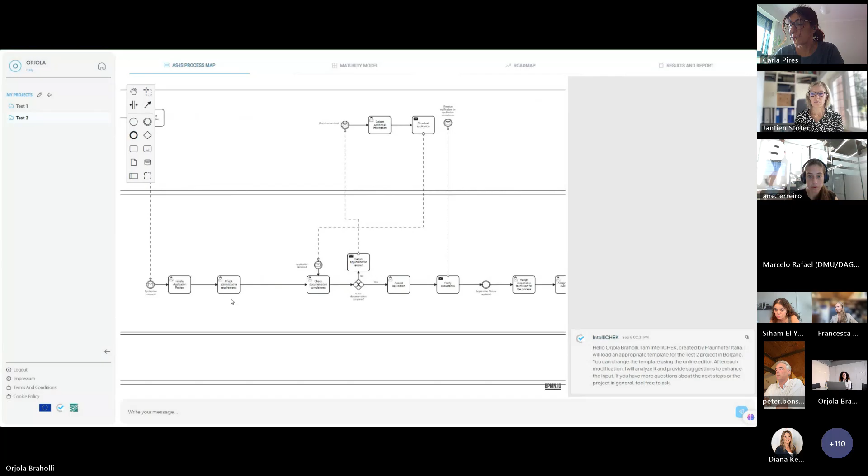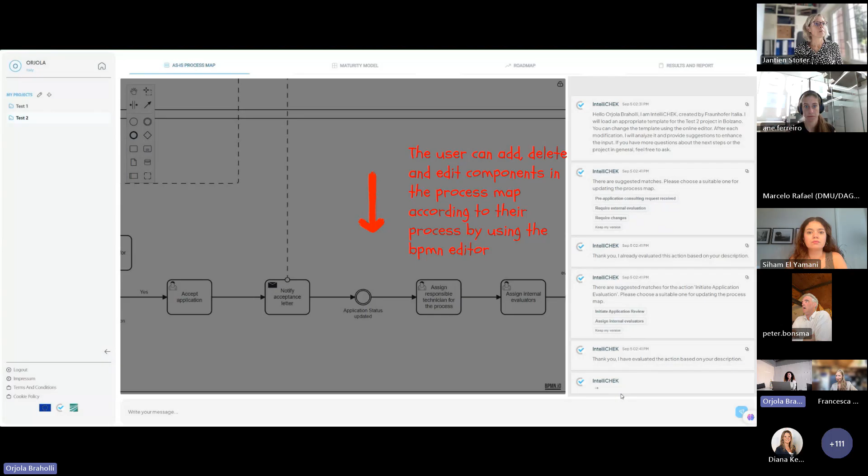So what the user can do is just create an account, log in, preferably provide a short description for their process, and then immediately start building their process map in BPMN. The tool supports bpmn.io and provides the user with a template that they can immediately start editing according to their process.

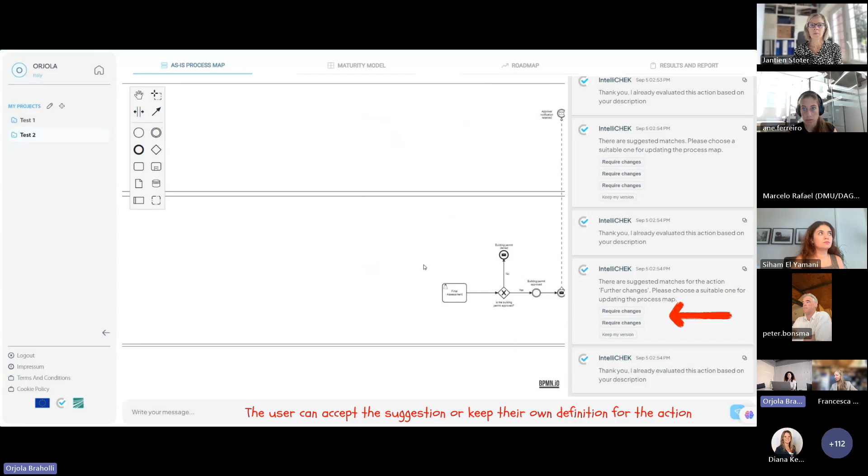What is maybe a novelty in this case is that the tool provides access to a chat we call IntelliCHEK, that guides the user throughout the process mapping to name correctly the actions of the process map, and asks the user for the necessary information that the tool needs to then do the maturity assessment of the process.

As soon as the user has finished building the process map, from then on everything is quite automatic, because the tool automatically assesses the maturity of the process and then builds a roadmap for the user to have during their transition process in the municipality or public body where they are operating.

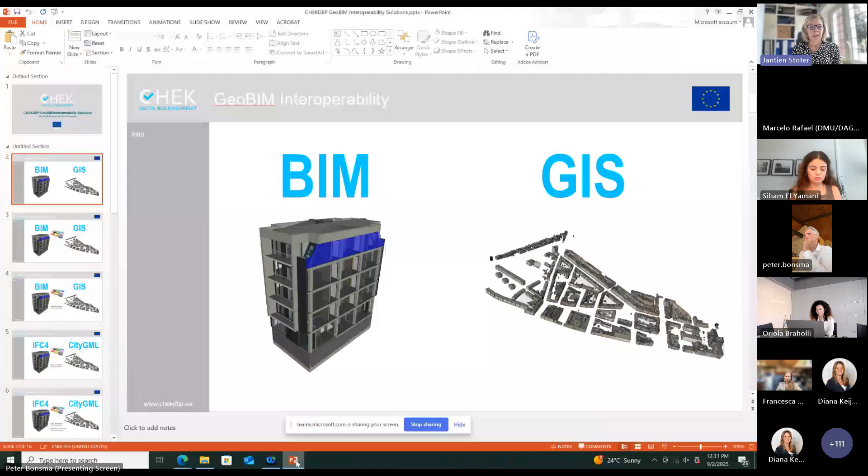This session is about the integration between geographical information and BIM models, which was a key principle in our project to be able to do checks on the design in relation to the geographical context. Several project partners worked on this. In this session, we will have presentations on the conversion from BIM to Geo, the conversion from Geo to BIM, tools for IFC georeferencing, and also some tools for validation of geographical information.

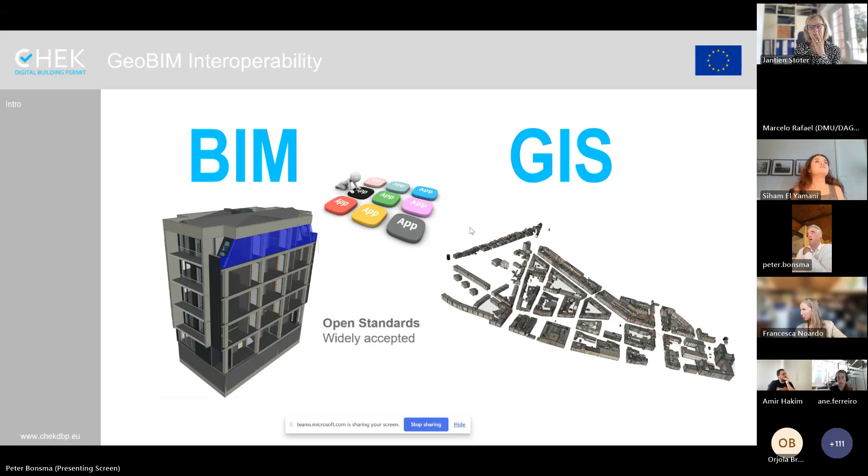The nice thing is that we have both OGC and buildingSMART as partners in the project, and both organizations host the most common open standards for BIM and GIS. So in this project, we're looking at IFC4 and CityGML. Further, if you look at applications, there are exceptions, but in general an application is either BIM focused and supports IFC, or it's GIS focused and supports CityGML.

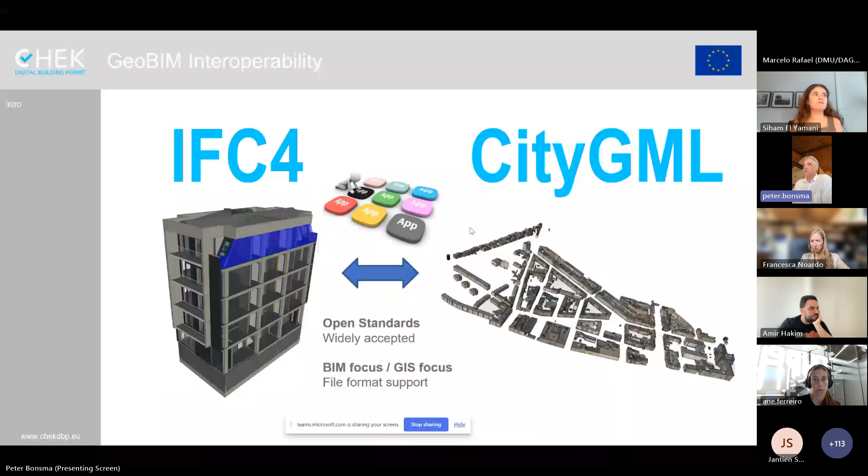That means in this project, we have chosen to make conversions so that the data from the GIS side that is really needed for the building regulations can be read in a BIM-oriented application as if it were BIM data. So we made a conversion from CityGML to IFC, so people can read the GIS data as if it were BIM data, and the other way around: people can read the IFC data as if it were GIS or CityGML data.

The third part is the content expectation. Applications don't only expect a certain file, like an IFC4 file. They also expect to be able to do certain calculations or certain work with the data. They expect a certain structure of the data and certain contents available. Therefore, we have validation, both on the BIM part and the GIS part. Today, we will also show the validation from the GIS part.

That means that you can validate: is this data that we're inputting correct, and is it enough for us to execute the building regulations?

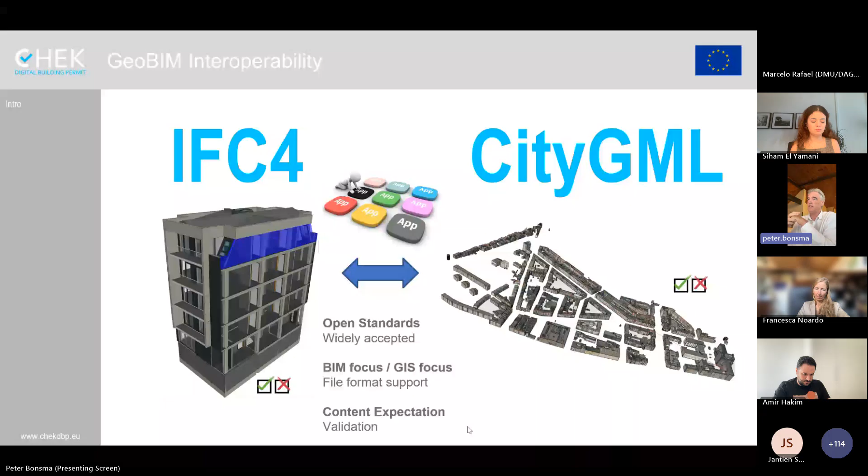So we will show four different parts today in this session. The Geo to BIM conversion, which was part of Work Package 3. The BIM to Geo conversion, also part of Work Package 3. The GIS data validation, part of Work Package 2, but of course, Work Package 2 and Work Package 3, together with software vendors in Work Package 4, worked very closely together on these developments.

And the georeferencing. So one of the things that is often missing in BIM applications is a proper georeferenced file. So the content is there, but often it's not in the right place. So one of the applications made by the TU Delft is a georeferencing tool that adds this correct georeferencing data to an IFC file.

Let me start with the geo to BIM. So how do we go from CityGML to IFC4? When we started, GIS was quite new for us. So in our development together with partners, we first created the GIS library. And to do that, we created an ontology of the GIS data, an ontology we can open in our existing tools. So we converted the GIS data, CityGML data, into an ontology.

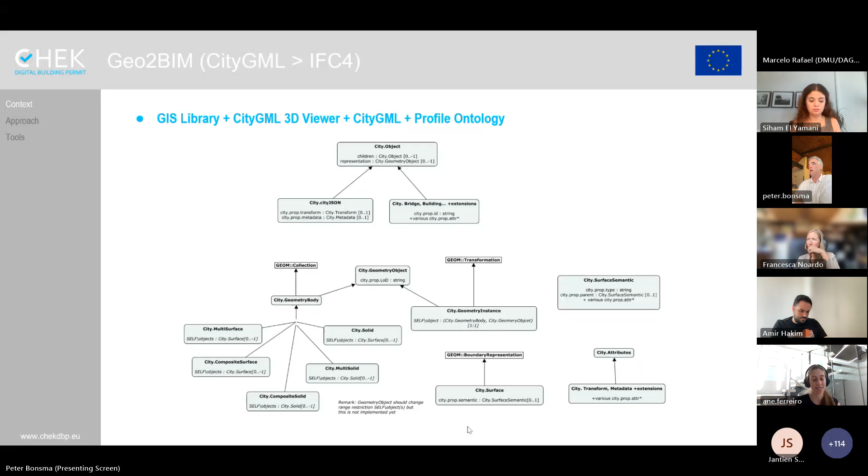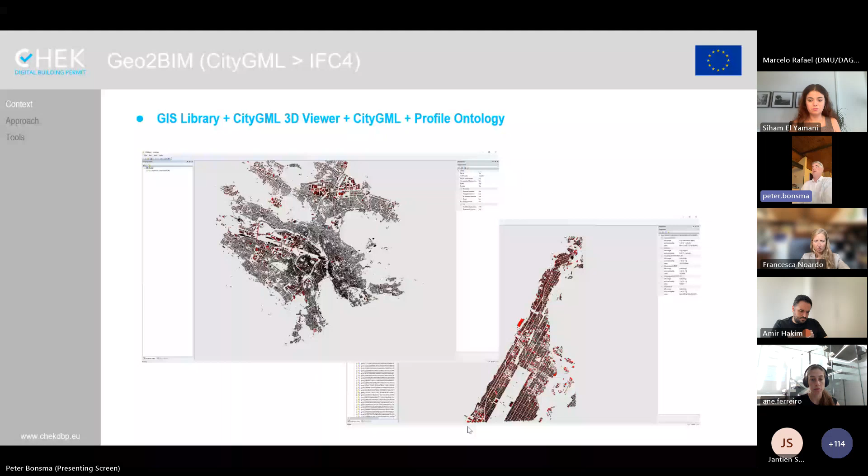This ontology can then be visualized. So we see the geometry, but we see also all metadata available in the CityGML file. And then based on this library we developed the application that does the conversion. So it reads the GML file through the library and then exports an IFC file.

It's a two-stage process. The first stage recognizes the levels of detail available in the CityGML or CityJSON file. And then it lets the user select: are we only exporting the highest LOD, or are we exporting a certain LOD, or are we exporting all LODs? In principle, we are exporting all properties available and all geometry available from the CityGML file.

But often there are some extra settings available or needed. For example, if there's no color for certain concepts, like a roof, we can define a settings file that defines either if there's no color available, we give this color, or in any case, give this color to the roof.

The same for the properties. So all properties are converted, but they are converted in a one-to-one manner. So the property that is named in the CityGML file with a certain name gets exactly the same name in the generated IFC file. Sometimes this is not what we want. Sometimes we want to do conversion, for example, to be closer to the standard property set in IFC, or to be closer to a certain IDS that we have to follow. So in this mapping file, you can define the mapping from certain properties in the CityGML to certain properties, how they should be named and converted into IFC. Everything that's not set is just converted one-to-one.

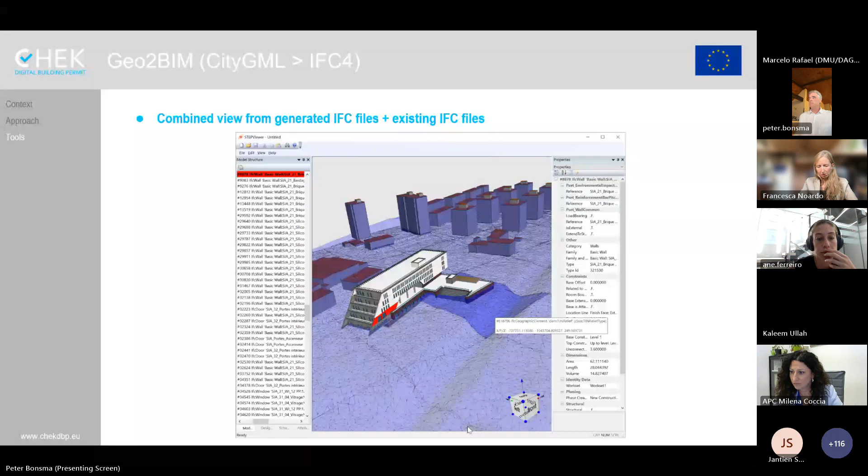Okay, can I share my screen, Peter? Yeah, I think I need to stop sharing. Now yes. Let's take a look. There we go. Full screen. So can you all see my screen? Yes, we can. Good.

So, hello, I'm Jasper van der Vaart. I worked on the BIM to Geo conversion. Next slide, there we go. Because for this project and for certain rule checking, it will be nice to have the model in the actual city environment. And of course, this can be done one-to-one.

However, certain rules are more challenging to check on an IFC model in a GIS environment, and also being able to format-compliant convert to a CityGML model or CityJSON model means that the use of the created models can be expanded. For example, aside from rule checking within this project, we could also do GIS scale analysis. And we can also use these created models to update existing GIS databases and models with more up-to-date data and even future scenarios of buildings that are not yet realized.

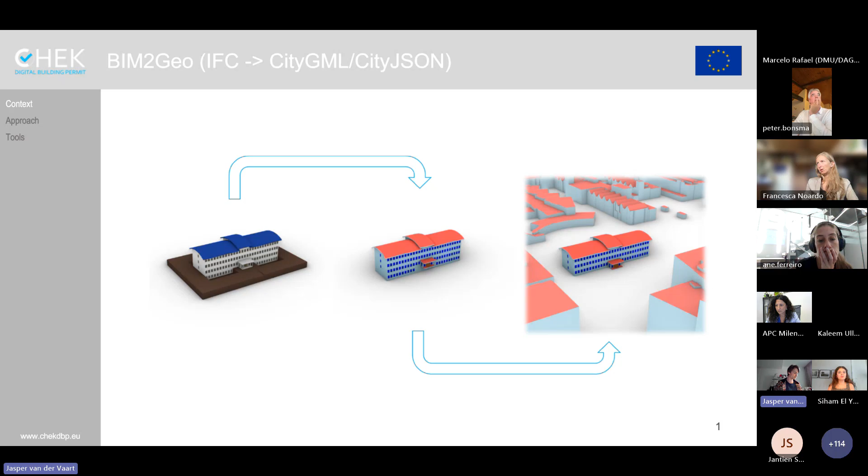So to create this conversion, we developed two different software applications. We developed the main one, the envelope extractor, which converts a BIM model in the IFC encoding to a GIS model in the CityJSON encoding. And for that, we used a library called CJT, which basically translates 3D data in a C++ geometry kernel, Open Cascade, to CityJSON. They have been developed in tandem.

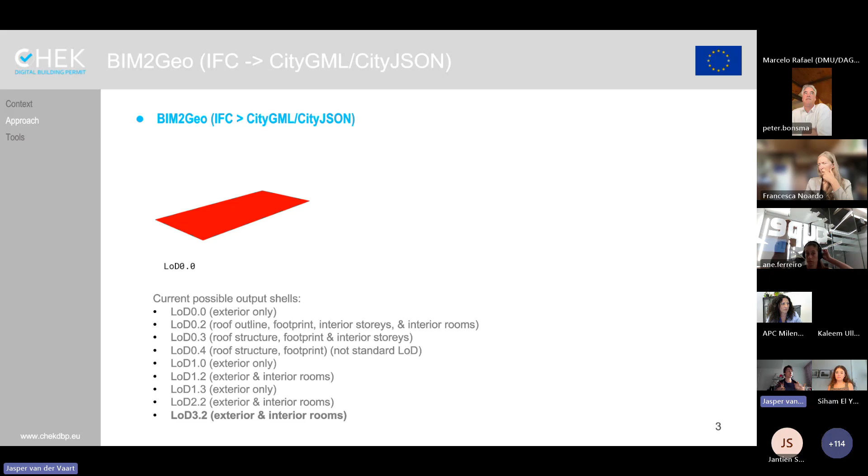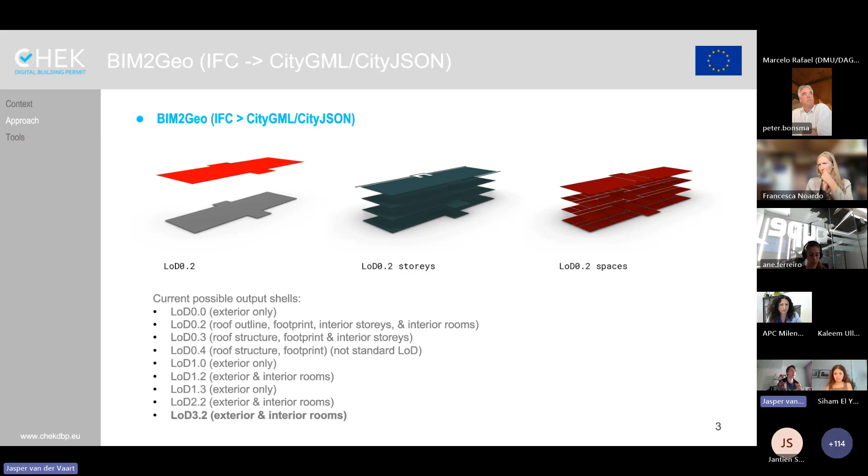So the tool that we developed basically creates a large set of different abstractions, which you can see looping here. Of course, for this project, it would have been desirable to create an LOD 3.2, which has overhang, windows, doors, and things like that. However, these models are geometrically fairly hard to make, and they also require a very well-constructed IFC model. Because this is not always the case, and because for certain analysis you could also use a more abstracted shape, we implemented a large set so that you could fall back on other outputs if the higher quality output is not per se required.

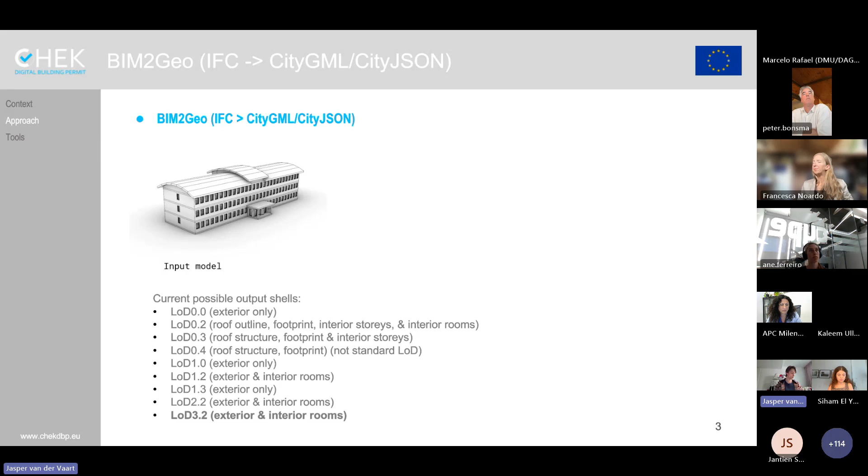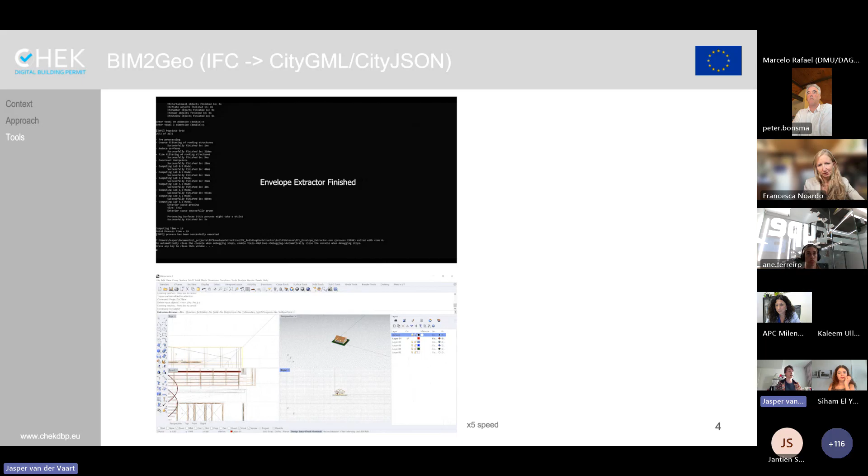So the application is a lot faster than doing it manually. You can see a comparison here between an old version of the tool and doing it by hand. I sped it up 5 times because otherwise, you can see, doing it by hand takes quite some time. And also nice to know is that in this comparison, the extractor actually creates, I think, 6 different models. So it's 6 different abstractions of the same model, while the one by hand makes only an LOD 2.2. So even overhang and windows are not incorporated in this model that I'm making by hand.

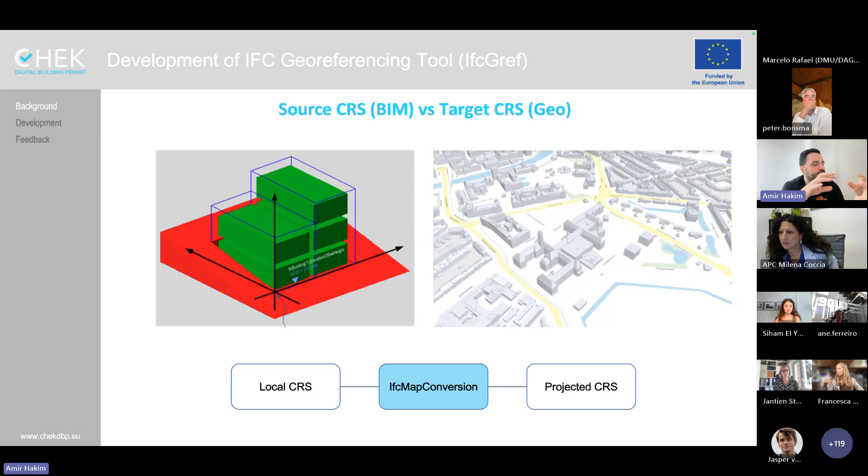Okay, I'm going to present about IfcGref, the development of the IFC georeferencing tool. So the main background question and the challenge was that the BIM environment and the geo environment are working separately in different coordinate reference systems. And there is a solution from IFC4 available, IfcMapConversion, in order to merge these two coordinate reference systems together.

And we use different sources in order to solve this challenge. Basically, some information from the IFC model, the geo information that might be available in the IFC model, like true north, like some IfcSite attributes or IfcMapConversion attributes. And also, it's possible to...

Sorry, there is a mic on. I'm checking who that is. No worries.

I don't see it anymore, so maybe it was already muted. I think it's resolved. Yes. Then the other thing is the other source might be the survey points added by the user to the system itself.

And there we decided to go with different process paths because of the possibility of different information available. So it's possible to do the georeferencing based on existing information of your BIM model, or you can enhance the georeferencing by adding survey points to that, or completely ignore what is existing, or it might be the case that your file is already georeferenced.

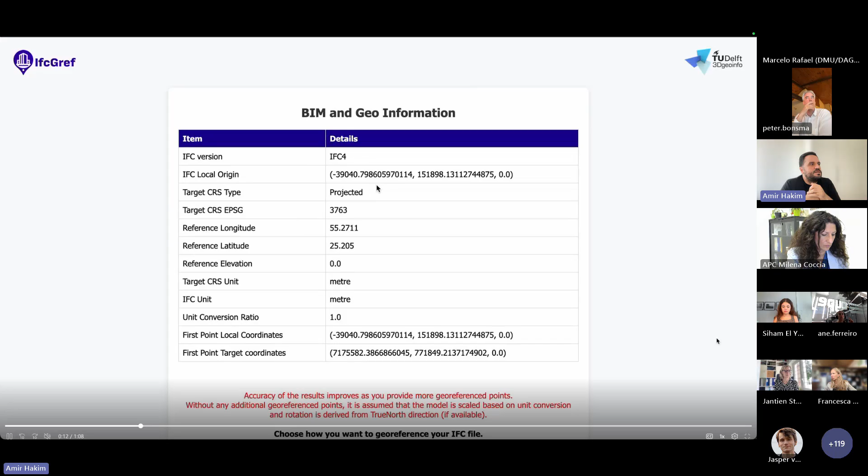So let's go through the demo together, just a quick one. So we developed a website where you can drag and drop your IFC model in a designated area. You can choose which CRS code you want to do the georeferencing with, and you will receive the basic geo information from your IFC model, which is available. And then you can go with different options, basically, as I discussed earlier.

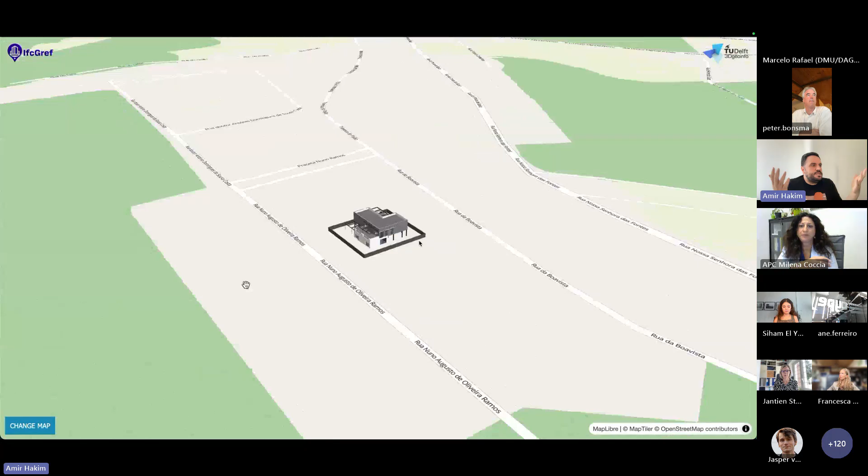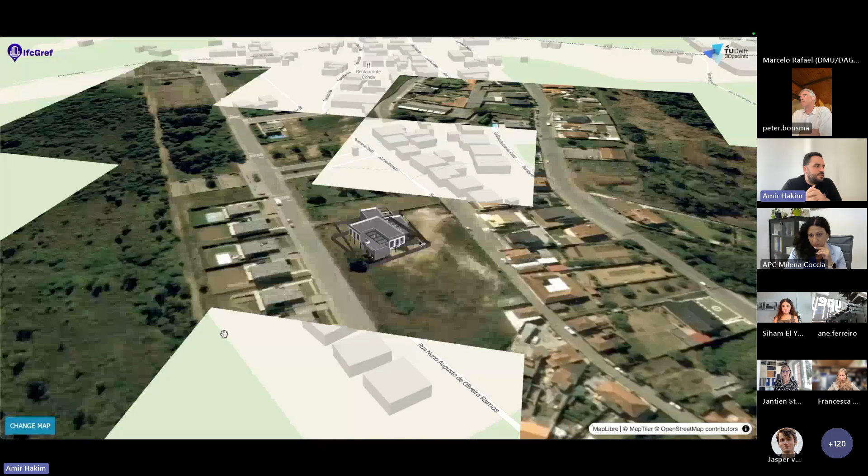So, for example, you can add a set of extra survey points. Then there is an optimization method happening in the background, and it calculates your georeferencing values, and then you can visualize the outcome in your browser easily to see how it works with the world map or 3D OpenStreetMap like this one, or also the satellite map as well. And let's go back here.

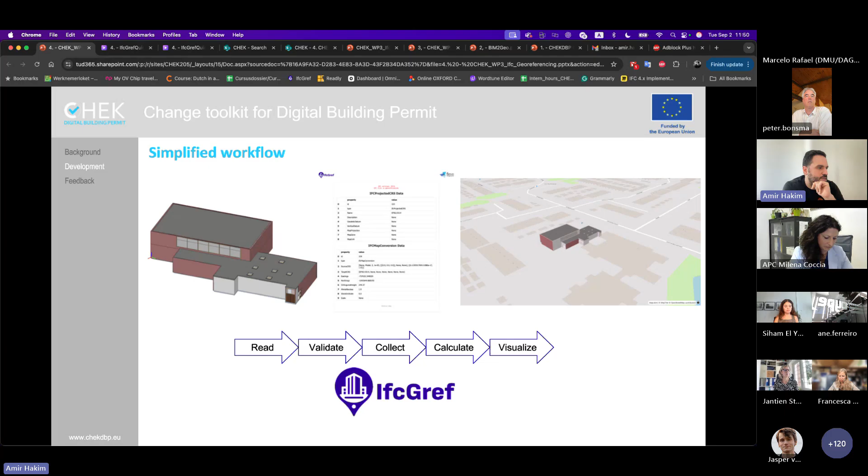Yes. So the simplified workflow goes with reading, validating, collecting files, and calculating the georeferencing values, and at the end visualizing the outcome of georeferencing.

And I think it's really nice to mention that this tool was developed based on different feedback sessions, like the nice WP3 bi-weekly meetings that we had. We had some in-person meetings in Delft with industry partners. Most of the time architects from the CHEK project also reviewed it and gave me feedback, and also software developers were really helpful in order to solve the challenges of the IFC georeferencing tool.

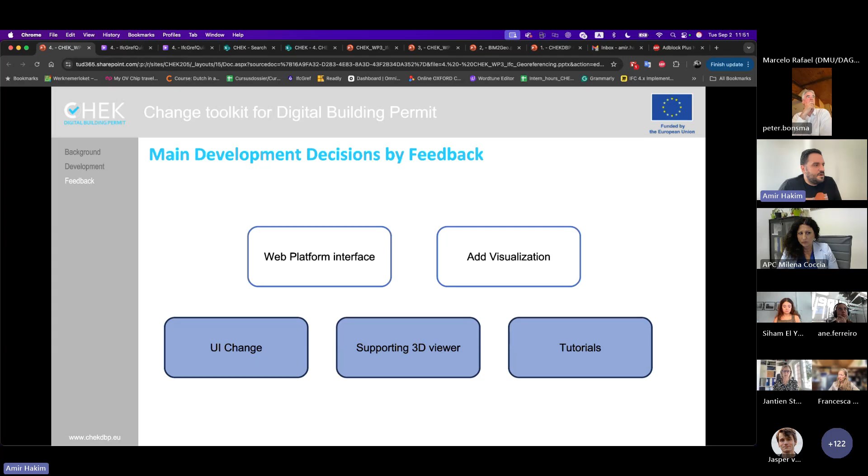And there were some changes. As Jasper also showed, the main user interface was completely different, and we chose to go with a web platform in order to be used easily by everyone, the UI completely changed, supporting the 3D viewer and adding tutorials. It was something that came to us as feedback, and now it's a tool that's been referenced in different backgrounds and workflows, as I can see.

And it's a web-based tool. You can go use it online for sure. And it's an open source code, so you can see the code itself as well. And that's it for me. I tried to be as fast as possible.

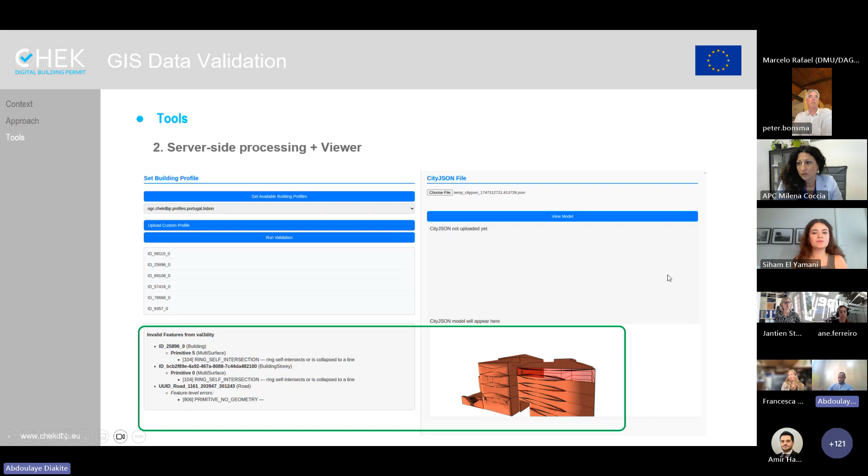And next to that, you also have a viewer. This tool provides a viewer, which is a three.js viewer. And it also lists the report in a more intuitive way. So these are two different ways of using the tool, and a third way is simply a fully client-side implementation.

So the SHACL errors are visualized, as well as the val3dity report, which are all already available as open source. And as an extra, you can click on the features, zoom on them, and identify exactly where the problems are. So for example, this was something that doesn't have a geometry, it's flagged,

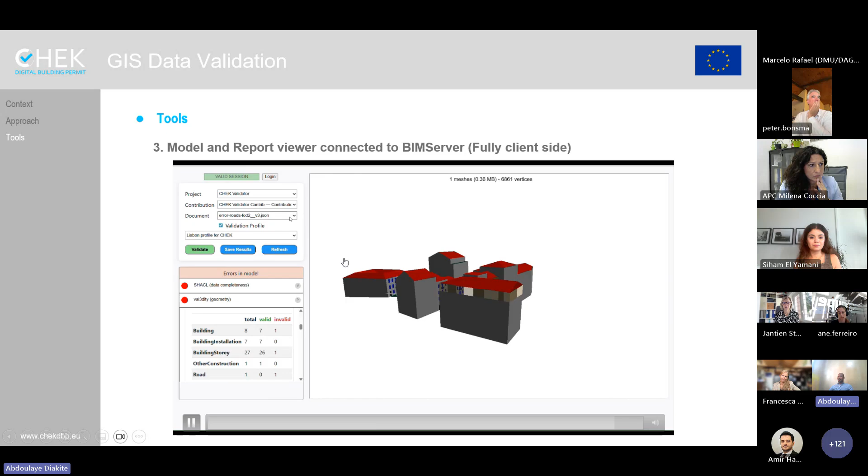and it shows you in the report. And the report is very detailed, so you can really have all the details that you need, but it's mostly for geometry and topology. And finally, you can save the results back in your BIM server, so that you can retrieve it later on.

So this demonstrates, okay, I had another slide with this, sorry. But this demonstrates three different ways of running the validation, but the principle is exactly the same.

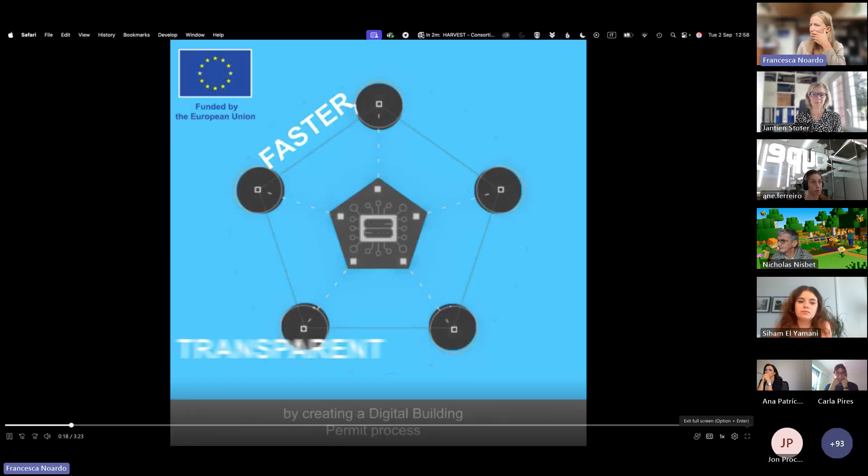Across Europe, building permits are still paper-based, slow, and unclear. This costs time, creates errors, and reduces trust in municipalities. The CHEK project, funded by Horizon Europe, set out to change this by creating a digital building permit process that is faster, transparent, and scalable across Europe. CHEK, Change Toolkit for digital building permits, brings together municipalities, universities, designers, and technology providers. Our goal is to align technology with real permit processes, use open standards, and provide a toolkit that any city can adopt. CHEK is built on 5 innovation pillars.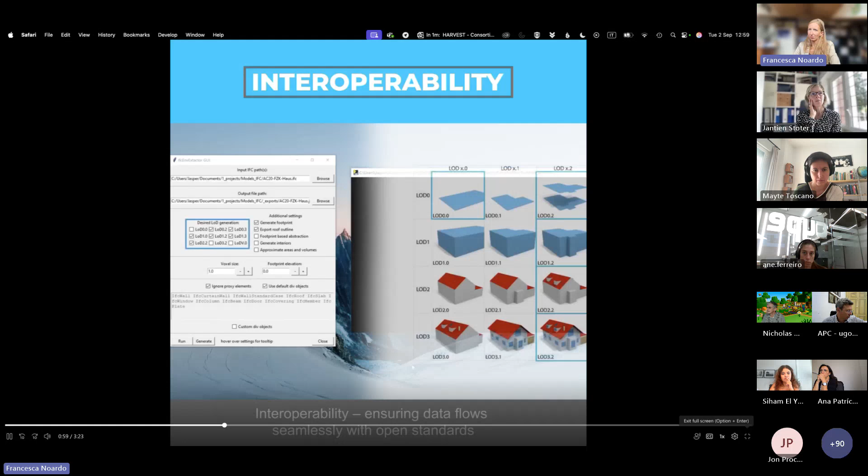Process, a digital process map that guides applicants, designers, and municipalities. Technology, new tools for validation, rule checking, and IFC to CityJSON conversions. Interoperability, ensuring data flows seamlessly with open standards like IFC, CityJSON, and Open API. Scalability, tested in 4 pilot cities from Italy, Portugal, and Czechia, proving solutions can adapt to any size municipality. Upskilling, training officers, designers, and students through MOOCs and practical workshops, preparing Europe's construction sector for the future.

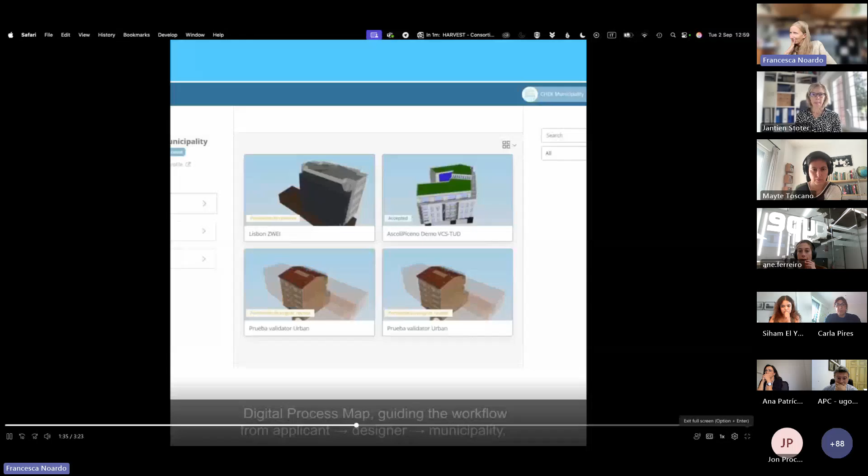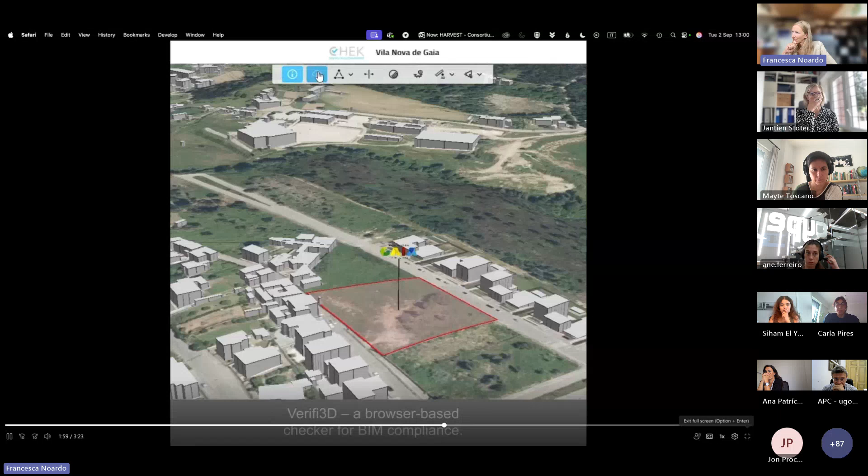The CHEK Toolkit delivers tangible results for municipalities and designers. Digital process map, guiding the workflow from applicant to designer and designer to municipality, replacing paper-based steps. A process management platform acting as a common data environment with version tracking, validation, and secure digital signatures. A suite of compliance checking tools seamlessly connected through Open API, SciP Urban, and OpenBin accessibility to check zoning rules, building codes, and accessibility. Verifi3D, a browser-based checker for BIM compliance. Virtual City System, VC Map plugin, to verify urban rules such as building height, setbacks, shadows, and view sheds.

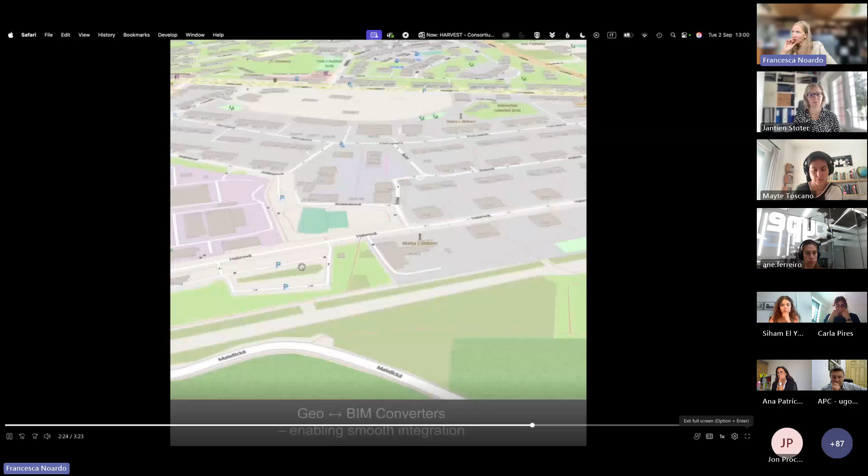Interoperability tools, IFC validator and CityJSON validator, ensuring data quality. IFC post-processor fixing model exports. GeoBIM converters, enabling smooth integration between building models and 3D models, making GeoBIM a reality. Training programs, including practice-oriented sessions for municipalities and designers, technical scientific courses, and massive open online courses, ensuring upskilling across Europe's construction value chain. Together, these solutions increase efficiency by more than 60%, reduce errors, and can be adopted by up to 85% of municipalities in Europe.

CHEK proves that digital building permits are no longer a future vision. They are happening now. By aligning processes, technology, and people, CHEK supports Europe's Green Deal, renovation wave, and smarter, safer, more sustainable cities. Discover the toolkit, results, and training at chekdbp.eu.